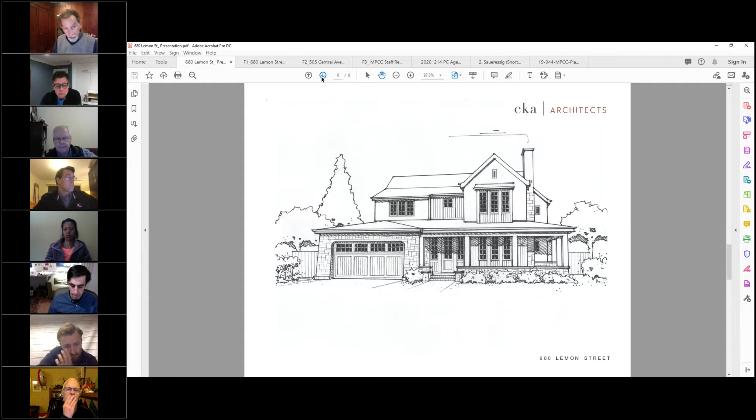The house itself conforms with all of the setbacks, heights, daylight planes, and square footage regulations. As you can see, our clients have done extensive outreach with their neighbors, as outlined in the staff report, to make sure that we don't catch anybody by surprise and that the design's been communicated. There has been some back and forth and removal of some windows and whatnot.

We're pleased overall that staff recommends approval of the project. We think it's an attractive design, and hopefully it'll be an asset for the street and the neighborhood. We hope you feel the same way. Thank you, and happy to try to answer any questions you have.

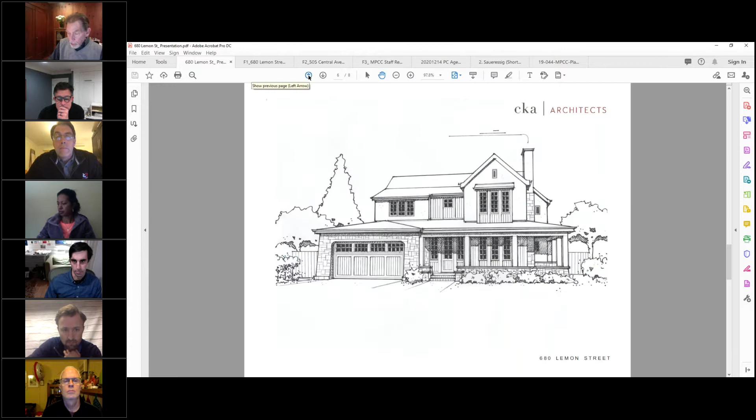Thank you, I had a couple quick questions. The front columns, I see on the plan, or on the elevation, they're noted to be wood, but in the rendering they look like they're stucco. Yeah, thank you, so that's meant to be white painted wood. Let's see if I can get us back to that image. Yeah, so that's meant to be white painted wood and not stucco.

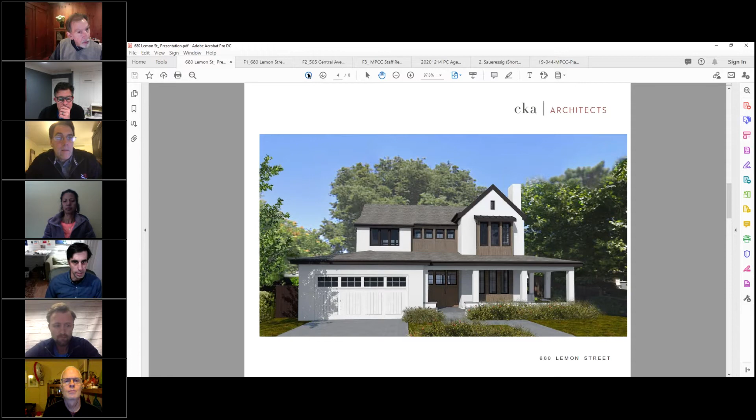And the chimney itself, did you, I know it looks like you studied some different materials, did you look at some stone for that? I mean, that's one of the hallmarks of the Tudor style, is a stone chimney. We did study some of that, yes. There were some budget discussions as well, and we opted for the stucco as a cleaner, also a little bit more modern look, and easier on the budget. Okay.

Could you talk a little bit about the flare that I see at the edges of the eaves? Is that a smooth transition, or is it more of an abrupt change?

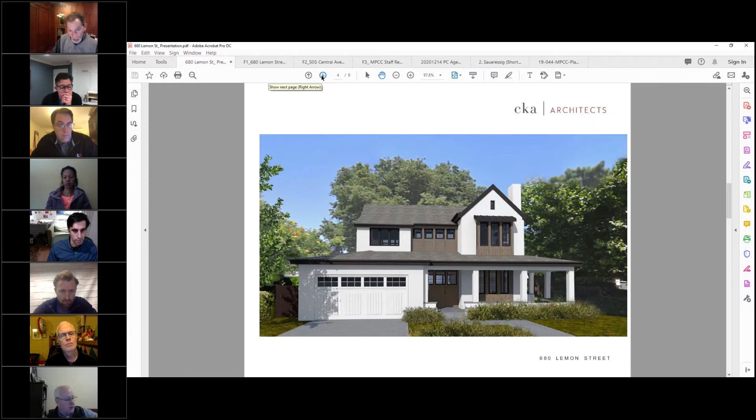I see there's a pocket door in the basement separating the ADU from the house, and I don't know if you're going to be able to get a fire rating with a pocket door like that. Thank you, that's a good question. You're probably right, we may have to go to a swinging door for that.

Any other questions? All right, seeing none, we will go to public comment.

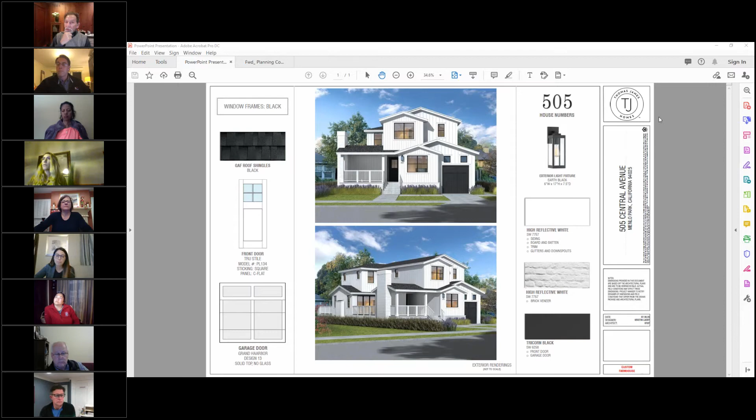I'm sorry, Ms. Felver, did you just say you're not demoing any of the house? That at that time, in July 2019, we were not demoing. We had our remediation contractors out there for asbestos and lead, not for the demo. So we're trying to clarify why our contractors were on the site in 2019 to the neighbor.

All right, so you're giving us a little bit of history. Yes. All right, okay, thank you. Any questions from our commission members?

Mr. Gale: Thank you, we'll follow up on a couple things I just heard. On the demolition, I saw a note and pictures that all the doors and windows are removed. Is that correct? Why is that, if it's going to be sitting there for a while?

Cynthia: So that's actually part of our lead and asbestos remediation work. Our process has them come out and do an analysis of what contains lead or asbestos, and then they come back and remove anything they find that is possibly hazardous. That's part of our process before we pull the demo permit, so that when we demolish the home, nothing toxic is released into the air. We only remove what is required per our contractor that does this work for us.

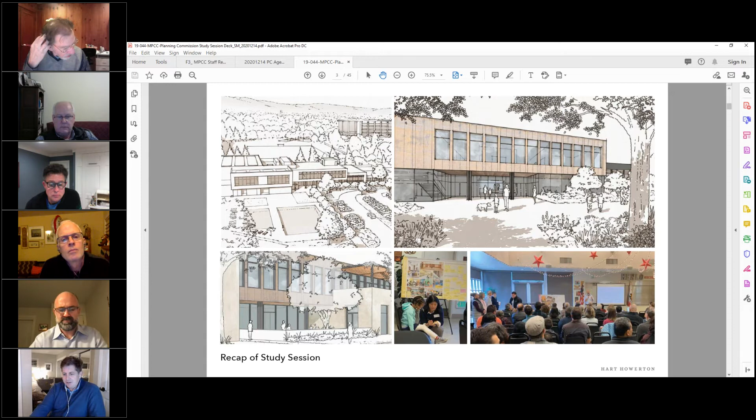As a reminder, the community engagement we did through a series of meetings last winter built on some of the early sessions we'd had with members of the community more than a year ago. Some of their key pieces were, I guess, expected and some were unexpected, and they came through Post-it notes, sketches, and conversations. Effectively, these items for each of these key program areas became central to our thinking and the programming, and pushed us and staff to understand, prioritize, and think a little differently about the facilities than what's out there today.

Out of our last conversation with you all, and the immediate follow-up with the city council meetings, some extras came up—things the city is really committed to above and beyond what was in the Facebook offer. It's going to be a pretty phenomenal building. Right now, LEED Platinum, an enormous commitment to solar. In addition to Menlo Park all-electric, we're looking at a microgrid, and enhancements to the structural and mechanical systems to make this a Red Cross emergency shelter—bulking up the design above what's certainly code, but even above best practice.

Some questions came from members of the Planning Commission around whether seniors really still have dedicated space here. I'll talk about that as we go through, because part of this proposal is asking the seniors to abandon a building literally called the Senior Center, and to share with other members of the community. Certainly there's an ask there, and we're also thinking there's a great benefit.

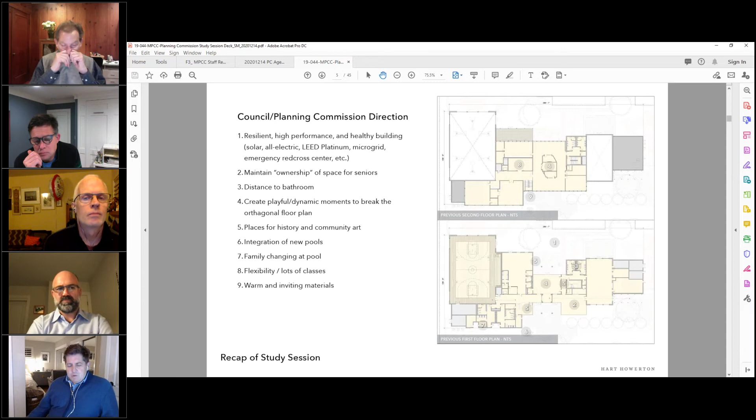One of those questions around seniors had to do with the walking distance from the front door to the bathroom. In the appendix of the presentation, I put some dimensions showing it's a little bit further for the men, a little bit shorter for the women, but happy to get into that later.

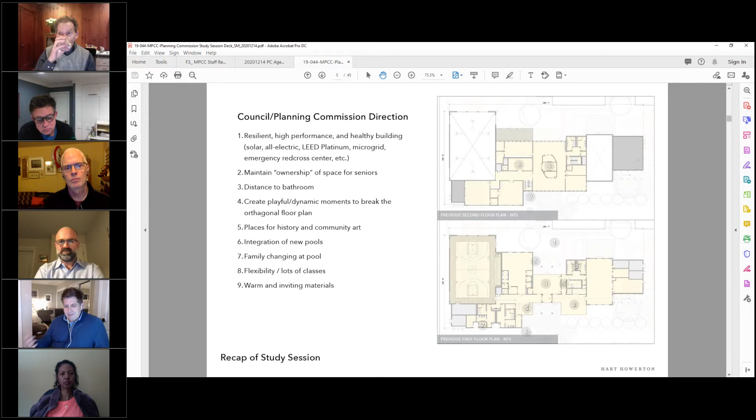There was a question from a few of you about architecture and making sure this is dynamic enough and not playing it too safe, but also a recognition that with warm, inviting materials, this is going to feel pretty good. And then lots of little observations you all provided around things like, is this an easy place for families to change? Is it flexible? Which were interestingly similar questions we got from staff and operator discussions.

Do we have enough family restrooms? Do we have enough showers? Are there too many bathrooms, or not enough? Are the dimensions right? We really sweated this down over the last few months to make sure we're prioritizing square footage, which comes at a real cost premium, and functionality.

We had an initial idea in the library that a central series of rooms—little study rooms and a conference room—might be interesting to create more zone around it. We heard loud and clear: we need sight lines, we want to be able to control this, there are better ways to operate this. So we've evolved the plan accordingly.

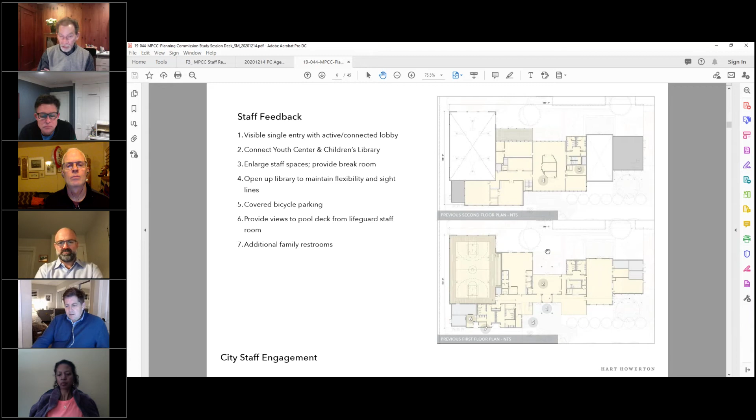Now, as we've looked at a more aggressive solar proposal, we're proposing solar car shades that extend down along the field. We continue to work with PG&E, Beechwood School, and other agencies to understand all the challenges that either lay underground or just above the parking lot here.

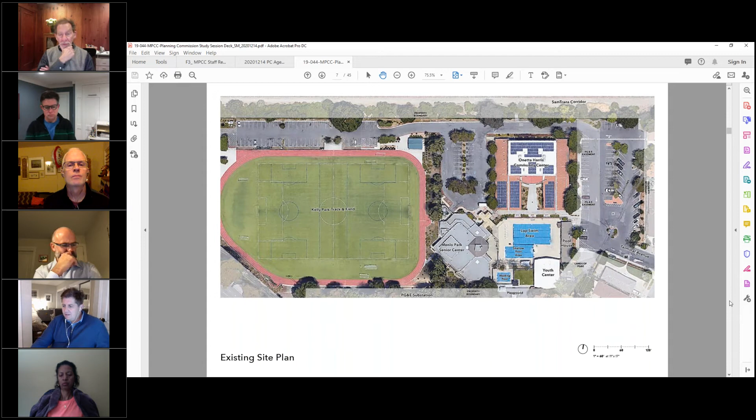Sorry, my mouse got a little jumpy there.

We will continue to note the pool as sort of not a part for this current exercise. The pool is on a parallel, although slightly lagging track as an element that the city's financing. So we're separately going through a programming exercise and a design exercise for the pools. It's all the same team, it's just on a slightly different track. But of course, those pools will utilize the locker rooms and changing rooms and lifeguard room that's in this building.

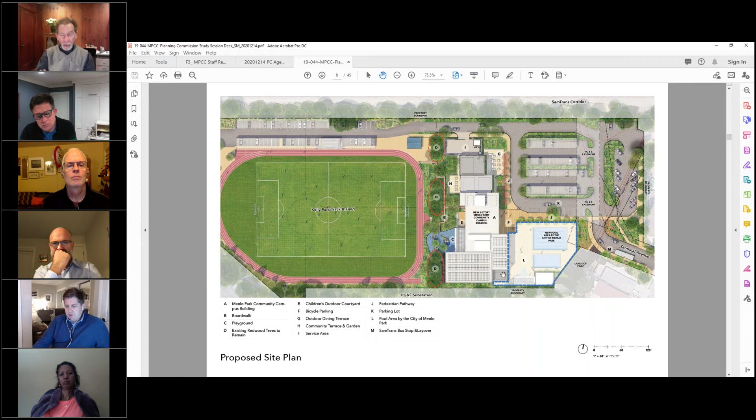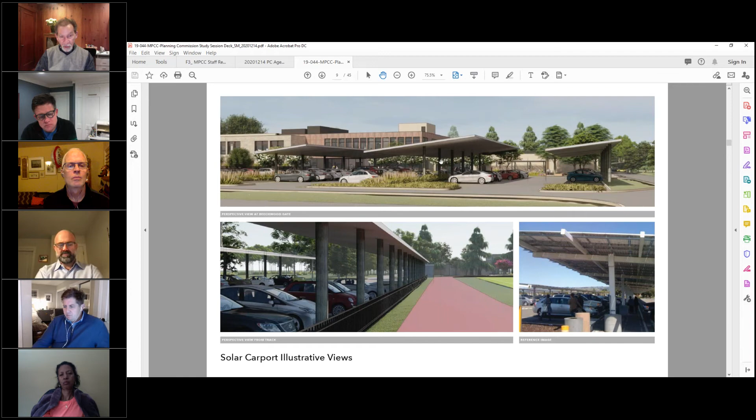So the current thinking for the solar car shades is very much like other places around town. Obviously, there's work to be done on exactly how the frame is going to work, but we wanted to at least share with you the scope of this proposal. You'll see in the roof plan, it's complemented by a significant amount of coverage of the roof, which is also proposed to be solar. Very much the way we discussed last time, and it's a very easy to find, easy to navigate parking lot.

We've been working through with SamTrans, the bus that provides rides to seniors, the Beechwood School, and how their morning drop-off and staff parking would share this lot. We've been working through service and servicing requirements around the microgrid and some of these other functionalities of being an all-electric building. The biggest change that you see here is we've gone from 2 entries to a single, easy-to-identify entry, and we think that this is good for a number of reasons. Certainly, staff was keen to see that.

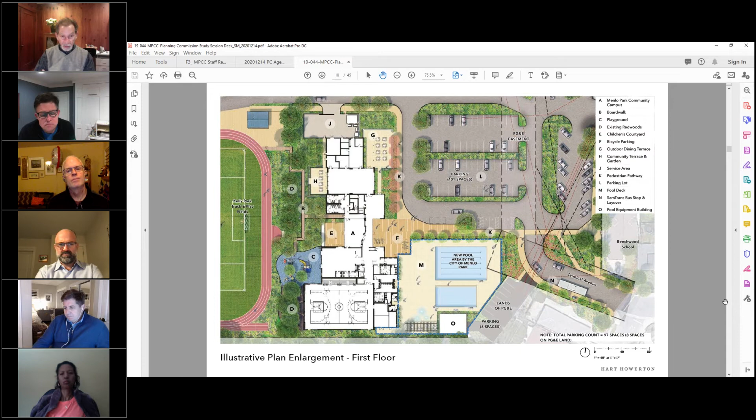Very similar to last time in terms of how the organization works, where we're putting names on these things, and I'd say the biggest difference from what it is today to what we're proposing is today you have multiple facilities that each have hours of operations, and they sit fallow for significant chunks of time during any given day or week. What we've all been keen to think about this facility as is a very well used, well loved space.

So a room that's really terrific for seniors to have activities and lunch in on a weekday. It's a great spot for a community event on the evening or a weekend. The children's library is a terrific place in the morning for little kids, and can be used in conjunction with the youth center in the afternoon for after school programs. And so how do we get these places to do double duty? I think one of the outcomes of the last several months at least is that the organization of uses and the sort of interrelationship of these uses is working really well from an operational standpoint.

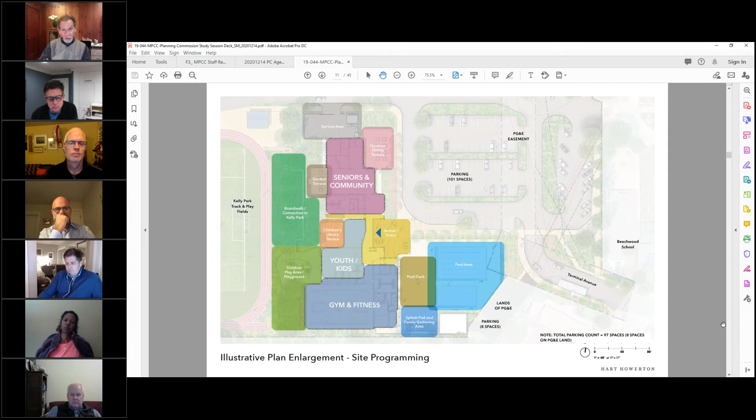So again, the idea, consistent with the feedback we've gotten from the community, is a warm, inviting, contemporary facility, a place that feels really unique and special, and people get excited about it. As you arrive from the neighborhood, there's this great deep porch, very transparent, welcoming ground floor. We have used a lot of glass in and around the entryway. You'll see that there's more sort of solid masonry-like elements to the wings, and then a metal system that's heavily glazed that really sets off this library and this collaboration space upstairs.

So again, this deep porch that I described, there's room for a handful of bike racks here, there's additional bike racks here, but a great place to be able to kind of wait for someone to pick you up or meet and hang out with a friend before you come in together. We wanted the children's library to be front and center, opens up a little bit, a place to park strollers, clear staff as you come in. The staff is really a control point for who goes upstairs, who comes into the locker rooms and out to the pool or into the gym.

We explored whether or not there should be a hallway that bypasses the locker rooms to go straight to the pool. Staff felt very strongly that a gate that could be managed and manned by the staff in the peak summer hours was better than dedicating hallway space.

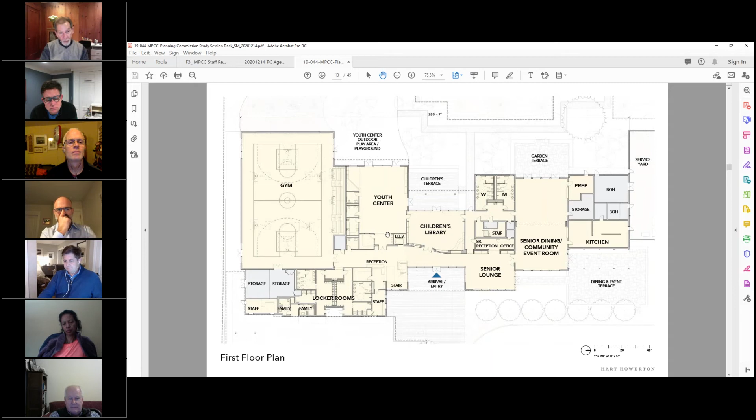Upstairs, as you arrive, one of the things we wanted to do was use the transparency of the arrival experience with this connective elevation feature inside. We're showing this curving, elegant wall. We think it has a wood finish, some special moments that shine a light, like a little reading niche inside the children's library as it transitions to the seniors area.

Unlike a traditional library, where every book is effectively under lock and key and you have to check it out, the idea here is that there will be books throughout, and in some cases an honor system to take away books. This is still being explored with staff, but I think there'll be a different relationship between people and literature in this facility than we've seen before.

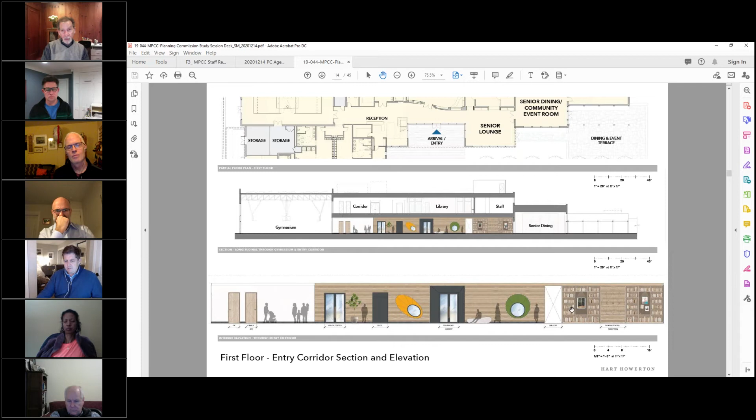Upstairs, this big open stair lands at the top floor to avoid the thumping of teenage feet coming up and down the stairs and disturbing people spending time in the library. There's a glass door system that separates the library from the corridor.

Since the last time we shared it, we flipped the movement studio, put in a big piece of glass so that when it gets used by little kids' dance classes, parents can line up in the extra wide hallway and watch their kids perform. But when it's a grown-up yoga class, we can pull the shades so nobody has to be on exhibition.

Fitness here, a series of flexible classrooms. The idea is that this is less like a traditional lending library and much more like a place to gather — whether you're gathering for a class, to learn, to study together, or, for a lot of the week, as an extension of the seniors center.

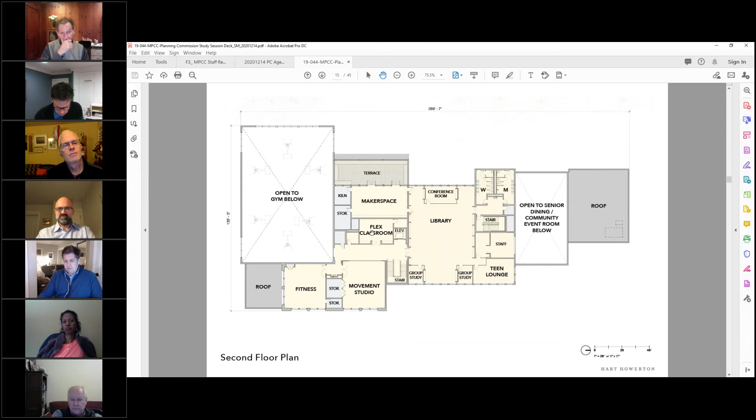Today, all the spaces in the senior center are really the precinct of the seniors. We see this entire library as really expanding on what the senior offering is.

Again, in section, I think Chair Riggs observed this the last time — we've used a generous floor-to-floor height on both floors to really invite daylight in from both sides. We want this library to have an east and a west orientation, so you can find sun, you can find shade. Same with the children's library.

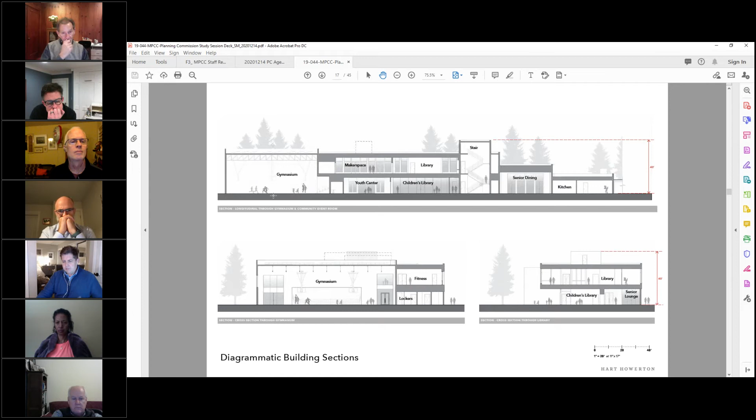The senior dining and community room is more than a floor high — really almost a floor and a half. The gymnasium is double height. Everything else is a generous one story. We top out at just about 40 feet to the top of our stair tower.

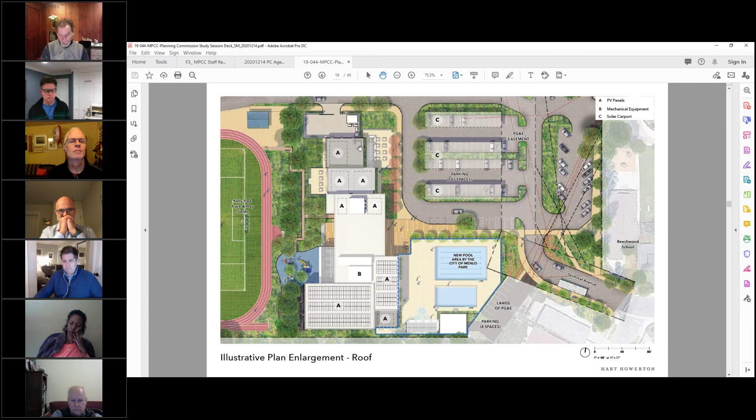Our current allocation of solar is shown here in white. Current mechanical systems are over the top of the commercial kitchen that supplies the senior dining room. We've got additional mechanical, and you'll see later we've got a full height wall around the service yard in a material to match the building, just to make sure all that stuff is tucked away.

So anyway, we're really excited. We've had a terrific time working with staff on the bones of the building, and since the last time we saw you, we've been able to flesh out the look and feel. Again, the idea is a contemporary building with warm, natural feeling materials.

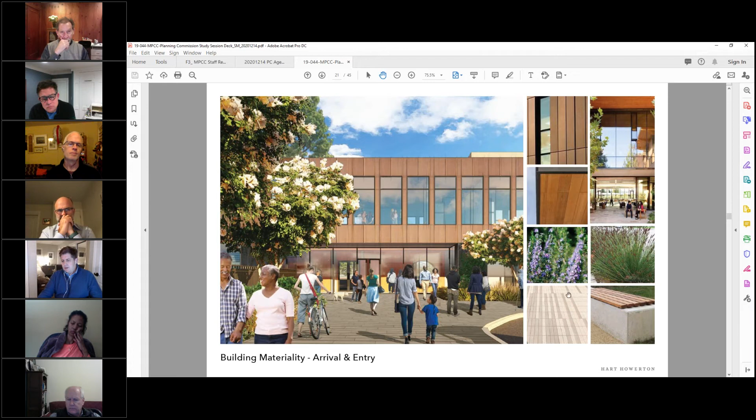Upon arrival, this metal skin describes the library, and is very glazy. The soffit underneath is envisioned to be wood — that mix of metal panel and glass describes the library. This is the kind of material palette we imagine on the site as you come up to it.

We've set that off of a more masonry feel. So the big flanking subordinate elements, the gymnasium and the kitchen, we're proposing to do in stucco.

The senior dining room and the fitness wing, we're proposing—if this was a college, we'd be showing Indiana limestone or something, but we think it's a stone-like material, whether it's a porcelain stone tile or another panel, something that feels stone and also works with the budgets we're exploring, but has that kind of character. I think in the next image you'll see that those can start to complement each other and work pretty well, again using some wood and soffits to set off what otherwise might be more of a stone metal vocabulary.

The pool—you know, it's not a resort, but it is California, so how do we create an environment that people really want to be at and spend time at, extending the swim culture here from just going back and forth in the lane to spending time and hanging out with people. So we're looking at a furnishing concept that has a mix of gathering around picnic tables under umbrellas to a place where you can catch some sun before and after being in the pool.

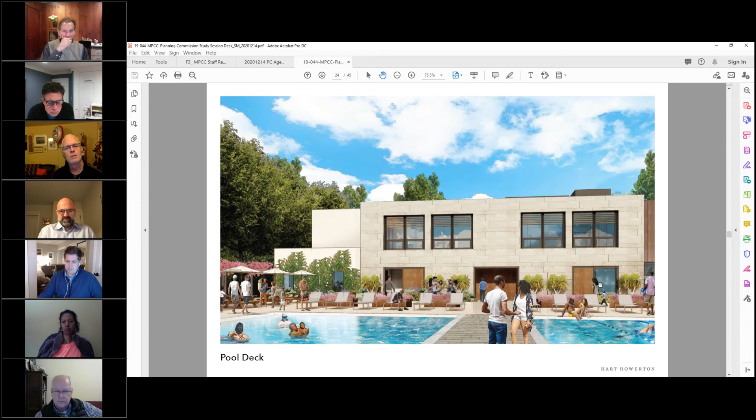Obviously the fitness rooms look over it. A series of these niches describe how you get to family restrooms, the locker rooms, staff areas. We've got the lifeguard here.

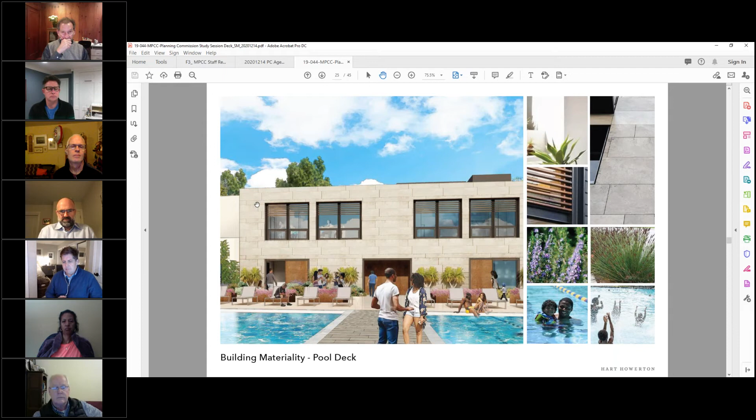Again in terms of finishes, obviously the pool is on a parallel track so I'm not showing you that, but even the coursing of the stone tile we're thinking about for this wing—we're trying to mix it up to create a rhythm and a scale, even with a material that maybe is more cost appropriate.

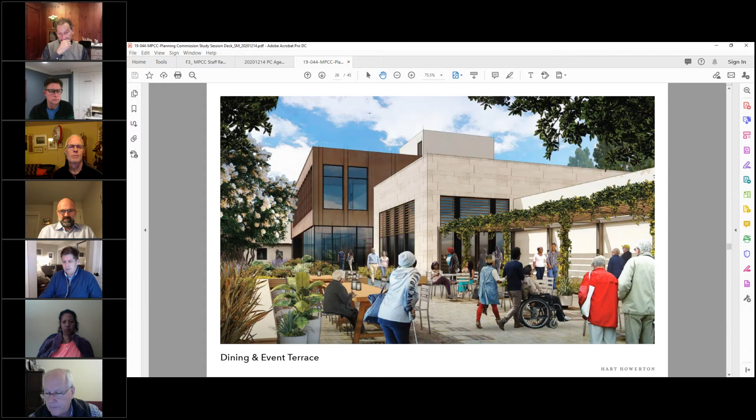This is probably my favorite space, off the senior dining room here—this is the senior lounge. It's this really great terrace. It's got a pergola, some crepe myrtles, and one oak that'll grow up to give it some shade. A great place to extend the lunch scene for seniors.

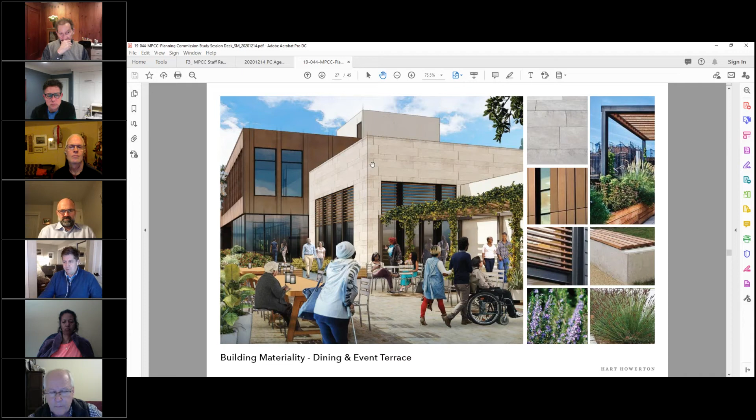Kind of bringing together the various materials, mimicking what's happening on fitness in terms of the elevation. What's great about this is it's perfectly positioned as a pre-function cocktail, outdoor dining space that, in the evenings and on weekends when community events happen here, is a really terrific space for all sorts of activities. So it's these spaces that can play from day to night, weekday to weekend, that we're getting excited about.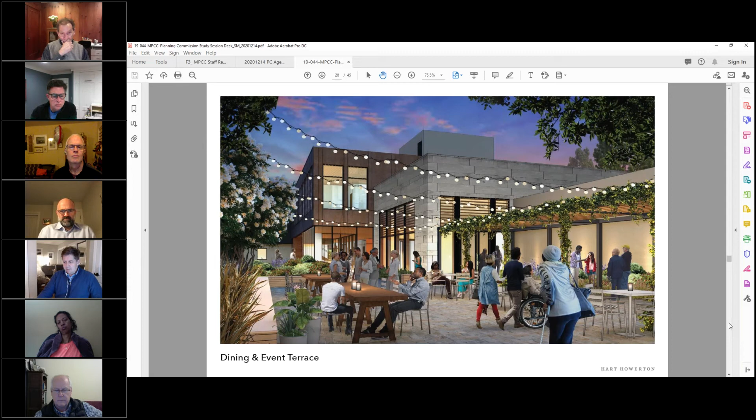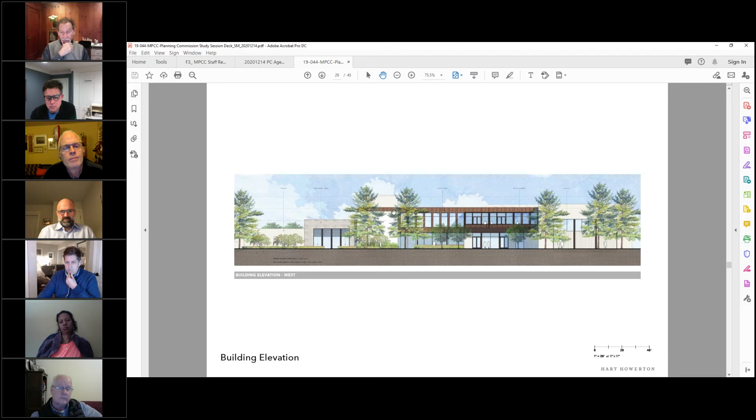Lastly, the park elevation, the Kelly Park side, where we've got the youth center—again this library language lays up on top. Here there's a terrace for the maker space. We've done some articulation to the gymnasium here, but wanted to remind you that there are these large existing redwoods on that side of the building.

So here's the big library move, creating the shaded outdoor children's library garden. This is the opportunity for a mural. We think there could be a really cool art program throughout the building that features local community history. We don't know what this mural would be, but it's a pretty interesting canvas that plays between the youth center, which is right here, and the children's library.

And then here you see this makerspace terrace outside, where we really wanted this opportunity for art projects and other kinds of events. You could have an evening wine and craft night that could spill out to the terrace and overlook the park.

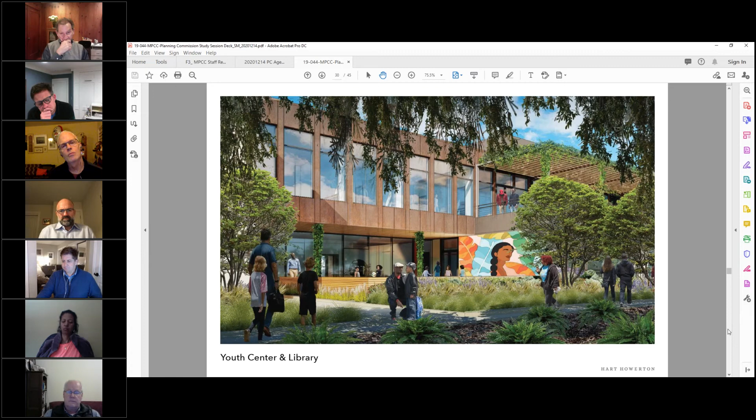I think the materials here start to mimic what's happening with the existing redwoods, and thinking about a playground and facilities that tie that in. We started to show this in our last session—we're still working through with the city what the character of this playground is. It should be open to the community when it's not operated as the youth center, so how does it feel cool and natural and creative and a fun place to climb around, all around the feet of these existing redwoods. It seems like it could be a great opportunity for a unique playground.

Just to summarize, the two stories, indoor, outdoor, relatively simple massing moves—we think it fits well within the height and the setting already established at the park, and really starts to connect to the park in a terrific way.

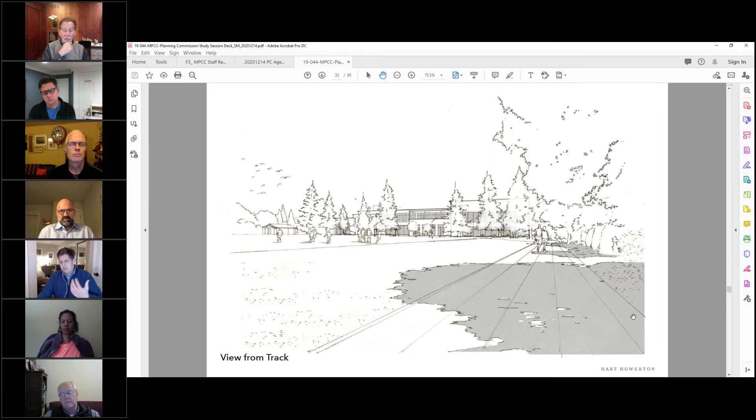The rest of this deck was really just there as points of reference from some of the questions that have come up before—obviously the tertiary facades. This one, the large gymnasium, we located next to the PG&E substation as a buffer, so this view is primarily afforded to the substation. We've also put a full height wall around the service yard with a gate to make sure the significant investment in equipment for an electrical building of this sort is all shielded.

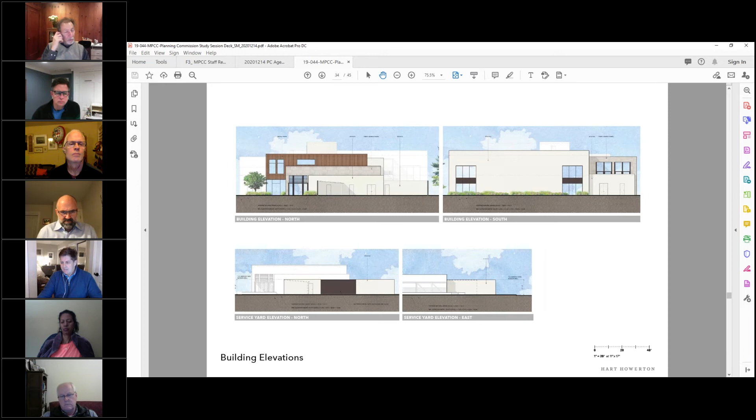And then the rest of these slides, which I think you would have seen in the deck, were just more reference, and I'm happy to talk to them if you'd like, but I'll just finish with the last slide in the deck, which was the schedule. Fergus, I don't know if you want to jump back in.

So I think the goal, as I mentioned earlier, is that we'll hopefully have approval by next month, and the plan is to start demolition in the summer. Construction will take about 18 months, with hopefully opening the facility in Q1 2023—so just a little bit over 2 years from now.

We're happy to answer any questions you have.

All right, thank you so much. It is always inspiring to see just the range of what is involved here in our community center. Commission members, any questions or comments before I go to public comment?

Mr. Kahle. Thank you. So I can't say enough positive things about this, so just keep that in mind as I have a few questions for you.

The last time we talked a little bit about how it felt kind of boxy, and I think you've done a lot to alleviate that—it feels much more warm and inviting. But the one area is the entry, perhaps.

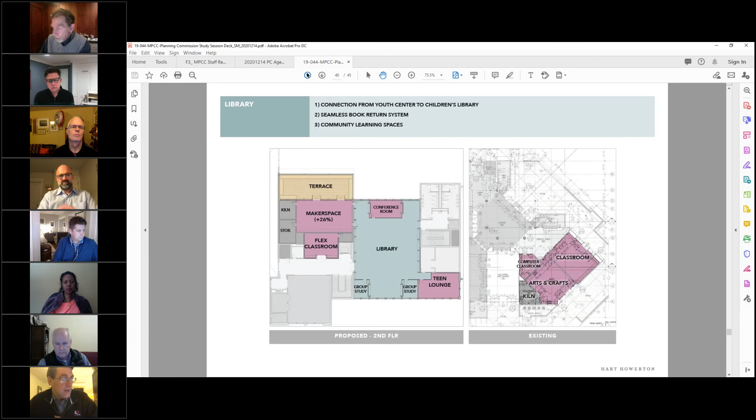I'm looking at drawing F30, the perspective of the entry, and it just feels to me a little understated. I don't know if that's something that can be addressed with massing or materials, or maybe something as simple as an awning. But I think it needs a little more emphasis as a visual cue of where the entry is. You've done a great job with the deep recess and going from 2 doors to 1 door, and that wood wall beyond will be really attractive. But I think it needs to be a focal point, easily identifiable from the parking lot or as you enter the space. Just curious what your thoughts were—had you looked at doing something a little different there?

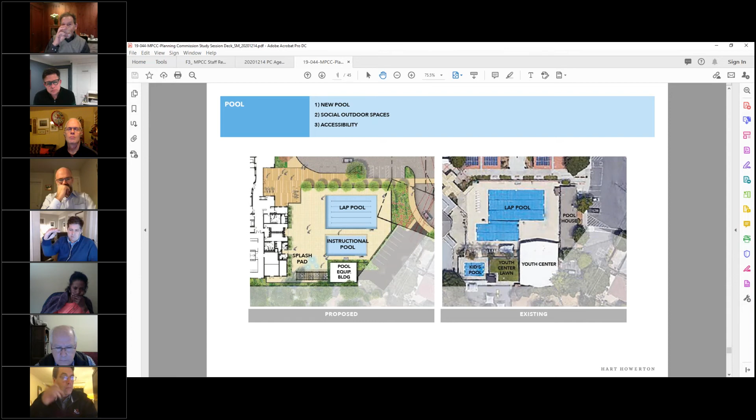Yeah, thanks for that. It is understated, and we intentionally stripped the signage out of the rendering. I actually think this is one of those instances where the rendering doesn't do it much justice. But the section, on page 16 of my pack, shows it's a really deep porch. So in actuality, with the wood soffit above this 16 or 18 foot covered porch, signage on that key element—you'll see the stair climbing behind the glass, and the wood obviously beyond the glass. I think it's much more dynamic, but in this rendering the glass reflectivity got cranked up too high and it feels a little colder.

So I absolutely hear what you're saying. I don't know that the awning's right, only because there's already this really deep, effective awning. But let us think about that a little bit, because you're right—it needs to be welcoming, and the rendering certainly doesn't do it justice.

Oh, thanks, yeah, just think about that please. And my question is, a big part of this entrance sequence is that the pool, I think, is right to your left in the rendering I'm looking at. What's the fence going to be like? Will that be something that's open and transparent so you could see what's happening in the pool, or will it be a tall wall—what's the idea there?

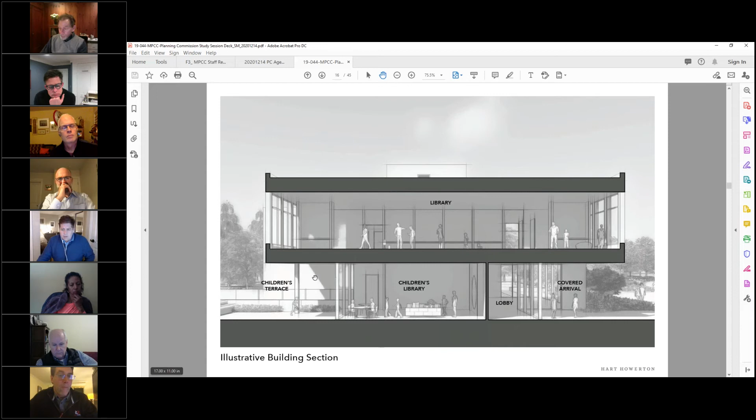Okay, yeah, I would just suggest something that has some visual cue, other than just an audio cue, that there's a pool beyond there—I think that would help the overall experience for people coming in. But thank you very much. I think you'll still see through it—it's still a picket, it just has layers of landscape in front of it. Thank you.

Other comments or questions?